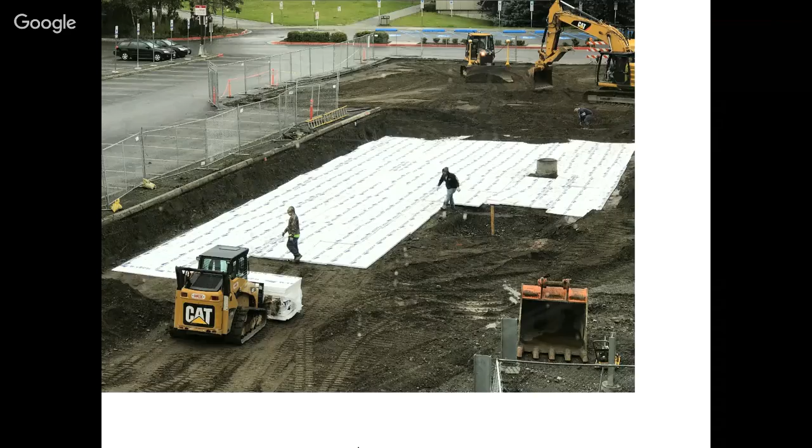Talk about motivation. You guys probably have seen plenty of plastics, polymers, petroleum-based products being used and being dumped everywhere. Lots of stuff. Expanded polystyrofoam, used for packaging, insulation. We use a lot of them here. Examples, fishing, those buoys. You just have lots of waste being disposed. And back to Alaska, any construction project in Alaska, you have to use some sort of insulation material, either fiberglass or polystyrofoam.

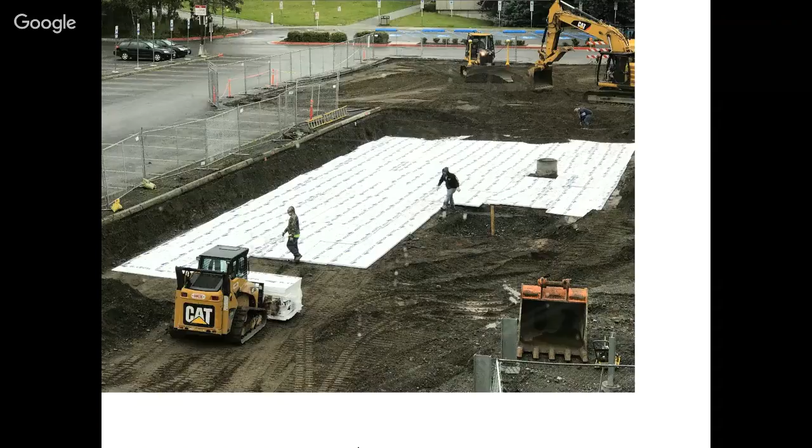Here's the parking lot right in front of this building. During last fall, am I right? Or last late summer, because of the differential settlement, the frost heaving, we had to dig it out and put a layer of insulation here so we can limit the frost penetration to control the frost heave, particularly differential frost heave, so that the parking lot is still flat at any time of the year. And last year, it was not the case, okay?

And this is a segment of highway on the Dalton Highway approaching Prudhoe Bay. It's on permafrost. Once you build a highway, you strip the vegetation, all those organic soils. That's almost like taking off our jacket. So the insulation that's already there in nature for the permafrost is gone. Given time, the pavement is absorbing heat from the sun. It's melting the permafrost, causing the settlement or differential settlement, damage on pavement. So at some point, they just decided to rip it off, rebuild it with a layer of insulation, miles and miles of them, okay, to make it last a little longer. I would say that's the idea.

So all those traditional insulation materials that we use, they are definitely very light, hydrophobic. That means they are not attracting water, moisture. They are very inexpensive. Okay, you go to Home Depot, you buy a bunch of them. They're fairly cheap. However, because it's based on mineral or petroleum products, it's not sustainable. It's non-renewable. And most importantly, okay, this thing, it's plastic. You dump it in the environment, it's not going to break down in hundreds, if not thousands of years. It's going to be there for many, many generations. So every year we dump a lot of them.

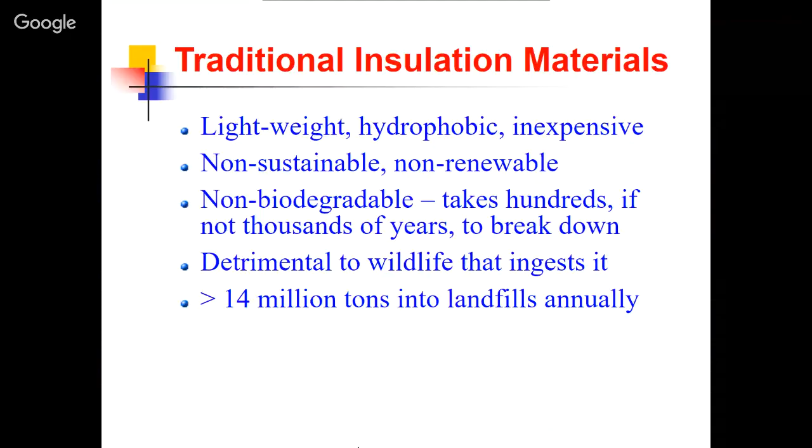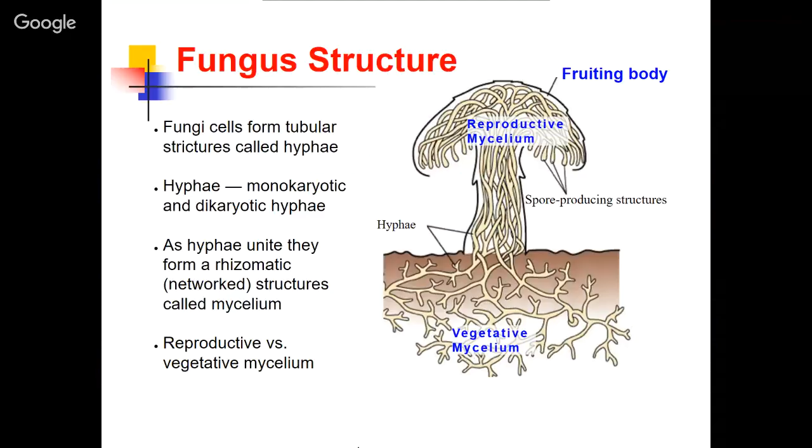So all those myceliums consist of hyphae, filaments like our hair. That is the fungal mycelium. That is the part, not the fruiting body, but the root system that we're trying to take advantage of to bind together with our material and form some sort of stuff. More on the fungal mycelium: those are filaments composed of long thread-like cells connected end-to-end.

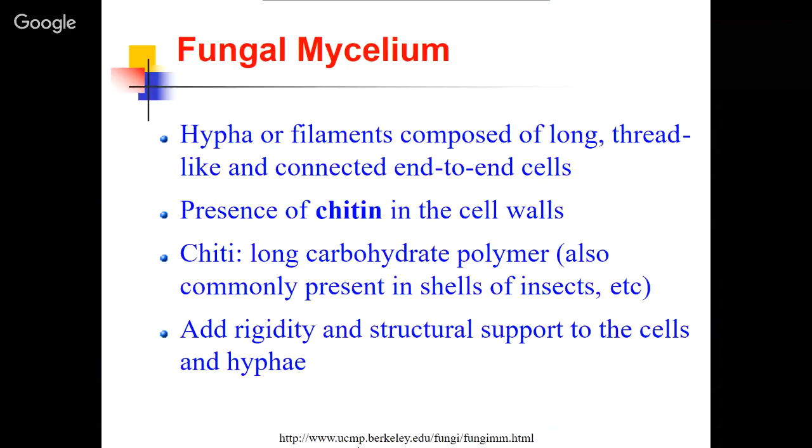In the wall of the cells, it has a special naturally produced polymer. It's like our plastic, but it's a naturally produced polymer, some kind of carbohydrate. It's like our fingernail, or our hair, or the shells of insects. It's the very same material, but naturally produced. That actually adds rigidity and structural support to the cells, to the hyphae, to the filament that we are trying to take advantage of. So that is the key, the science of this project, of this idea.

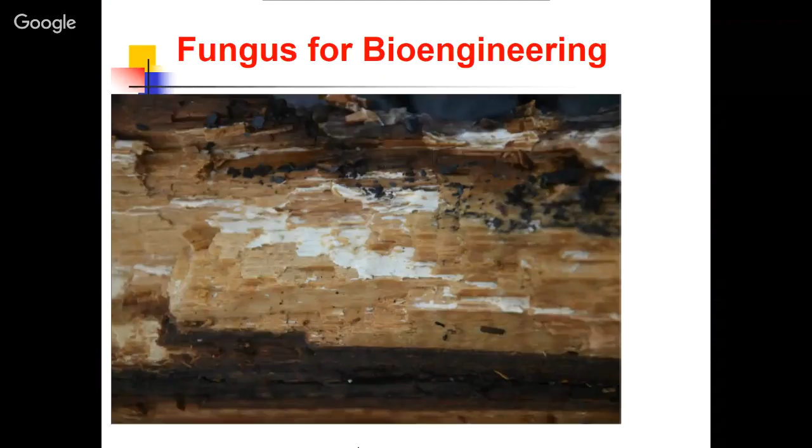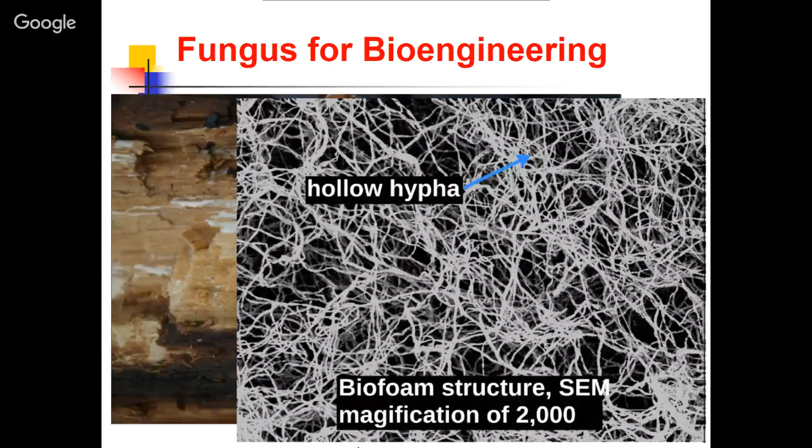So the idea of this project is to take advantage of those fungal mycelium and combine them with our substrate, feedstock, natural fibers, sawdust, agricultural waste, plus some additional nutrients, additives, and form a three-dimensional matrix bound together by those myceliums, which we call the biofoam. And because the filament itself is hollow, there's lots of air trapped inside. Insulation is about how to fix the air, right, in your jacket, whether it's feathers or fabric.

Tom, you have a question? Yes. So is the fungus actually consuming the waste? Yes, it's consuming a portion of that. That was a trick question because it actually does. Yeah. Tom Ravens has a question.

Is the fungus consuming the substrate, the feedstock? Yes, 100% true. That's the point. For the mushroom to grow, it needs nutrients. The forest waste, sawdust, or agricultural waste provides the majority of the nutrients. So it's trying to find moisture and nutrients to grow, to colonize. It does consume a portion of that, and then you still have some residuals left over, and that's what we bind together to form a matrix. So the majority is air, actually. That's why the material is light.

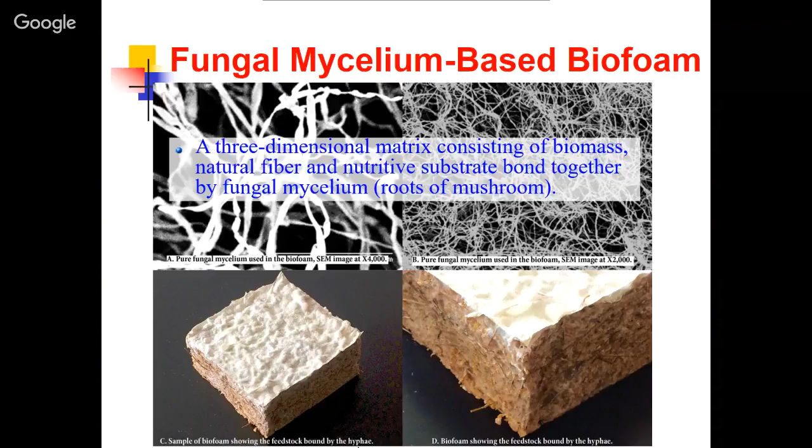Now for the bioengineered material, we're taking advantage of the mycelium. We promote the growth of this mycelium in a matrix in a controlled manner. The matrix is formed of mostly agricultural waste or forestry byproducts, plus some ingredients, to form this biofoam, nicknamed mushroom insulation. So manufacturing versus growing, it's very different. It has totally distinct properties, and impact or footprint. I'm going to talk about it later.

So where is it made? Like that board that you showed, the mushroom insulation, is it made in a factory? I'm going to talk about that. One question was, where is the mushroom insulation material made? It's not made yet. It's not available in the market. We are trying to make them, and I'm going to show you some preliminary results. We have 4x8 panels already produced, and they look pretty good. It's just a matter of how to mass produce them. It might be like an industry building? There could be, yeah.

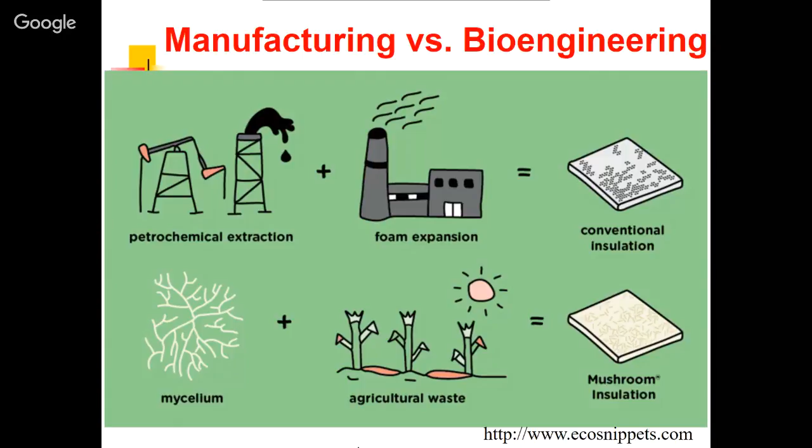That's the goal. We want to produce this material and market it so that people can use that. Okay. So this study, we had a couple of phases, phase 1, phase 2. First of all, is to prove the concept. Is this doable? Can we do that? Is the material produced going to be useful or comparable to the commercially available material, to the stuff you can buy from the Home Depot? Can we do that? Can we get there?

Okay. How to optimize the process so that we can do it in a time-efficient way. How long it's going to take. We don't want to take months or years to grow, right? It's going to be too slow. We want to do it very quickly, consistently. So I'm going to present some data to compare those key properties, like R value, the density, the toughness, the modulus of elasticity, the flexural strength, with the commercially available material. And then some prototype process for mass production. I'm going to show you some ideas.

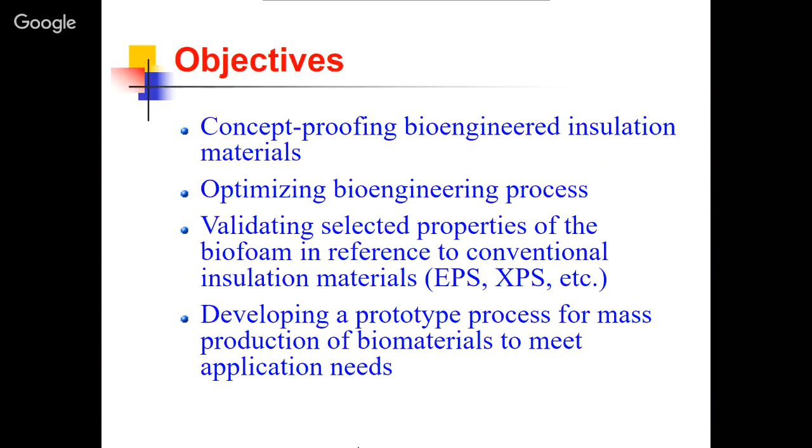I'm only going to talk about some key aspects. The bioengineering process is pretty complex. Many of you probably don't care, but some key aspects about the process. First of all, you cannot just use any mushroom to produce this material. It has to be a fairly unique mushroom that we selected, actually from Alaska, that has a very tiny fruiting body, because that's the part we don't want to use. It's kind of weak and it's edible, right? We want the tough vegetative mycelium part, the root part. So it's a special type of mushroom that can survive in cold temperature, that we have found very

promising. And then the second item would be the nutritive substrate, the feedstock. What do you use to grow the mushroom? Which one would be more effective? What is the percentage of the combination? We have tried sawdust in different particle sizes, fine or chopped wood, different types, adding some other materials. The blending mixing protocol: you have to add the culture of the mushroom to the feedstock. How do you do that? What process do you follow? I have some pictures to show that.

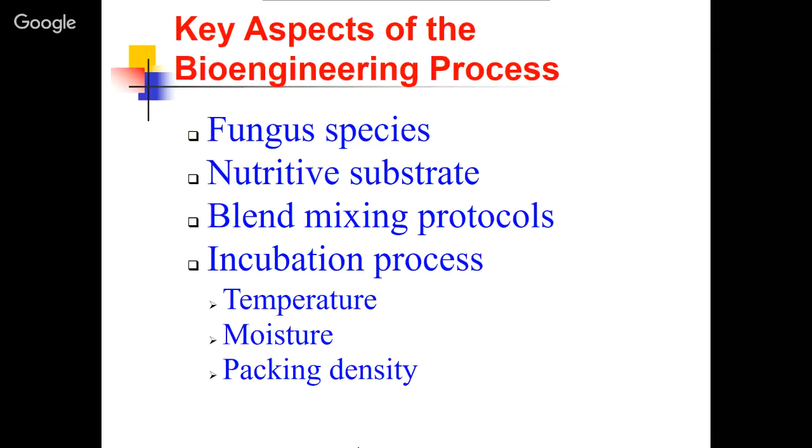Once the feedstock is mixed with the culture, then it's the process of growing. We call it incubation. How to grow the mushroom. In the incubation process, the temperature. Some of you may have grown mushrooms. Temperature is one thing, right? It does not grow in the winter time if you don't have a greenhouse, or if you heat it up. At low temperature it's not going to grow. Moisture is very important. The packing, the density, the ventilation, are all important factors.

We found out that, first of all, it can accelerate the growing process, and it also allows the matrix to be more sturdy. Put it in plain English: more extensive growth of the matrix to bind all that stuff together. So just two examples of the blending mixing protocols, and what difference it can make.

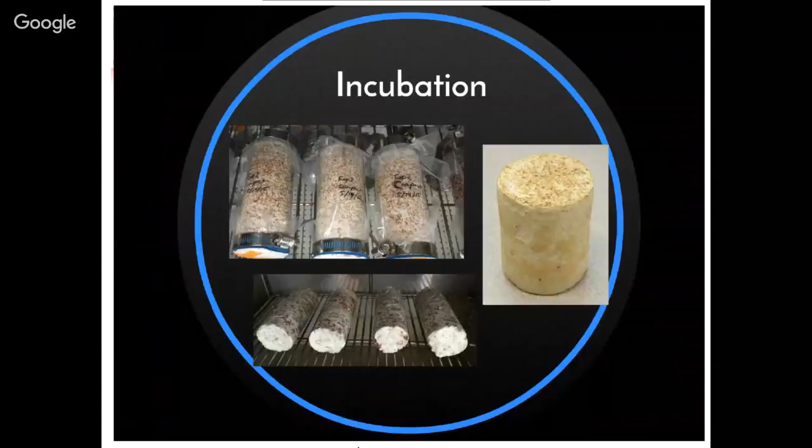Here's a picture of some samples in an incubator. And if you zoom in, look at the material. To answer Tom's question, you still see some raw material. It's not 100% digested, but all those gaps are filled with the matrix, with the mycelium. So the air is fixed inside those voids or tubes, so that there's no convection going on if it's heated up. So that's how we make it very insulative, how the R values are very high.

I forgot to mention the names. Maria White was one of them. Kellen Lee is one of our graduate students who have been helping with the projects.

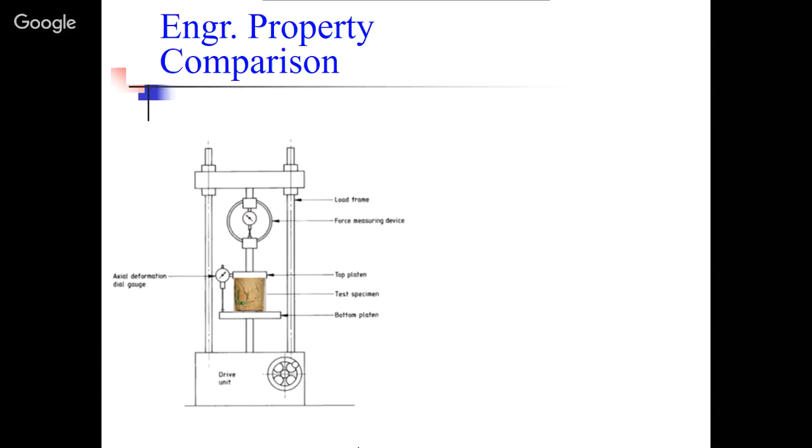Some samples we produced in the first phase of study for mechanical testing, they look very consistent. At the early stages, we have run some tests, like where you test those concrete blocks, for example, just unconfined compression test. And you would obtain those so-called stress, strain, how much deformation. Those are different recipes, 5, 6 groups, and looks like this guy is standing out. And that happened to be our group number 3 over here.

Not just the compressive strength, but also the modulus, shear modulus. And here's the thermal conductivity. They're about the same density. This is about the same as the others, but overall, that recipe number 3 seems very promising. So we build on that and then make some changes, trying to improve the process. So let me not go into the details here.

Talk about mushrooms. There are many edible mushrooms, but also there are many toxic mushrooms. So always a question people ask, is this going to be toxic to my pet? If they chew it up, if I handle that, am I going to get poisoned? So we did do a toxicology test. It's very safe. As a matter of fact, if you take the sample out from the incubator, it's just like mushrooms. It's very fresh smelling. I mean, if you're too hungry, you could eat it.

And some more mechanical testing here. Here are some small beam specimens, like the structure members, that you can see have some features. This is one of the newer specimens. Some scaffolding already built in there to accelerate this growing process. So it's not only growing from the outside, but also growing from the inside. So that can cut the growing time almost to half or 1/3.

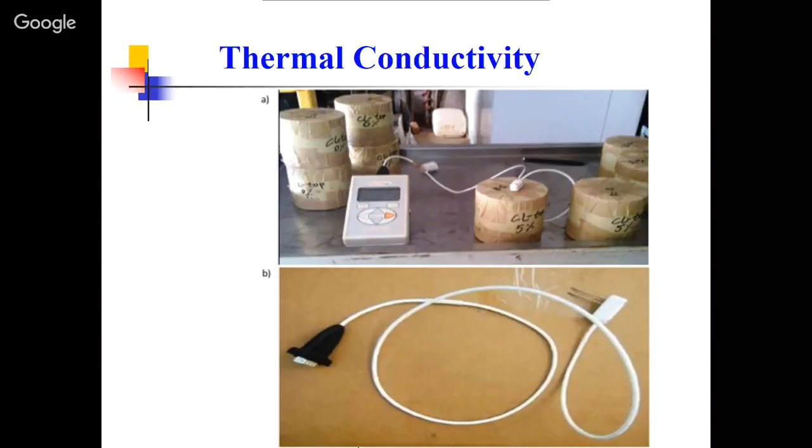The idea here is to have 1 needle to heat up. You measure how the temperature rises, time and temperature, and then you shut down the heating source. You measure how fast the temperature drops, because inside the specimen, the only mechanism for heat transfer is conduction. So it's conductivity.

So this equipment is very portable, is low cost. Compared with some other tests, this is very simple. This piece of equipment is still expensive, about $6,000, for a small one this size. But it's very useful. The accuracy is about 5%. We are pretty happy with the accuracy.

So a couple of equations. This is for heating. This is for cooling, and those parameters. Actually, B1 is inversely related to K. K is the thermal conductivity. Just one example how we figure out the thermal conductivity. Not too much on the theory here. I'm going to show you some numbers here. Okay, you're all engineers.

Comparison, for example, of the density. This is the dry density. Okay, those are our latest 5 recipes. This is the latest results, very fresh, a couple of weeks ago. This is the competition in the market, Ecovative, for packaging purpose. So it's about the same, I would say. The blue boards that you buy from Home Depot are still lighter, I would say. We still have some ways to go, but we have some ideas to improve that.

The thermal conductivity here, our numbers are about the same as the blue boards. So very encouraging, very promising here. If you talk about insulation, it's about similar performance. Now, compared with the market, similar type of material, 50% better, or the R value is twice as large. If you use our material to make a box to ship your fish to your friends, it can last twice as long than the Ecovative material, or about the same time as if you use those EPS foam boards. So we're very happy with the results.

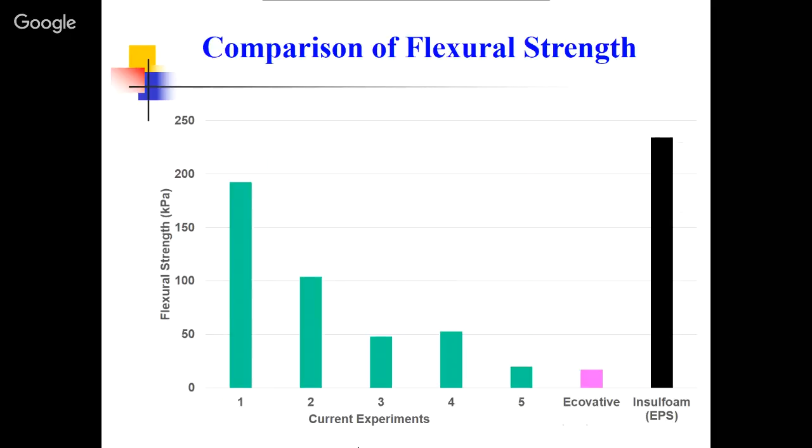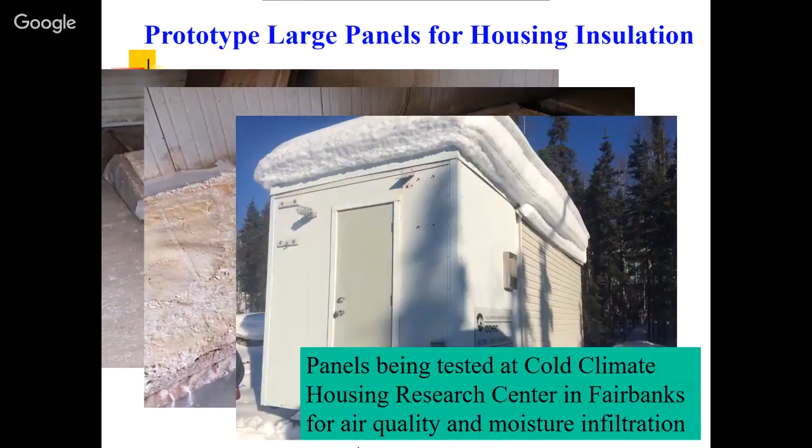And talk about production here. Last summer we tried to produce a few larger pieces. People wanted to try that. It's not for sale, it's just for experimenting. So we produced 3 4x8 feet pieces, about 2 inches thick, and they turned out to be pretty good. Those 3 pieces are now being tested at the Cold Climate Housing Research Center, side by side with the blue boards and some other materials.

There are 2 parameters we want to check. One is the air quality, of course, inside the panel. Lots of research says petroleum-based products have toxic emissions in the air. Not much, but there's some. So we're going to check how the air quality compares with different panels, different materials, and then moisture infiltration, all those other aspects. It's being tested now. By this summer, we would have some results coming out.

Talking about moisture infiltration, is there an estimate comparison? What kind of vapor barrier would this be as opposed to? We don't have that yet, but I'm going to touch on that one. That's a good question. The question was about moisture infiltration. That's one of the challenges we're trying to work on, but I'm going to get back to the question, okay?

When we present this and people are interested, they want to use it, the natural question is how do you produce that? What does it take to do mass production? I think it's quite doable. From a first cut, I would envision a few silos to store the raw materials, either forest waste or agriculture waste, with some other ingredients. Then it's proportioned onto a conveyor belt, mixed together, and then you have to sterilize it, because natural materials have lots of microbes. You don't want them competing with your mushroom. So sterilizing definitely is one process.

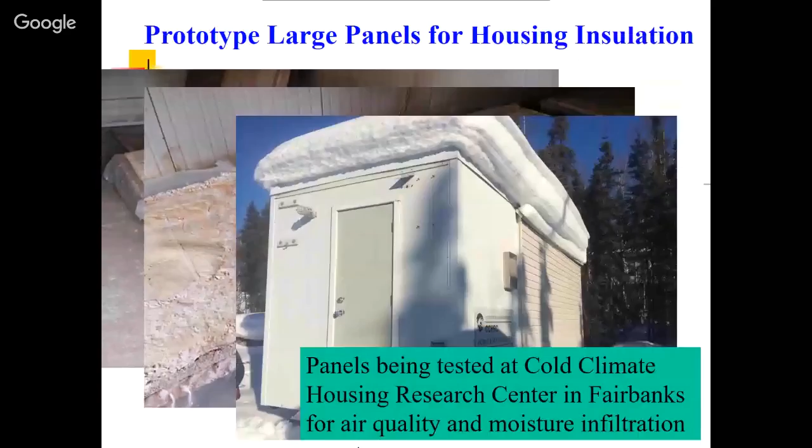The question was, for this species of mushroom, how big is the fruiting body, and are spores produced? The fruiting body is tiny. We inhibit that, so it's basically only the mycelium itself that was live. There were no spores, and the mushroom was not able to produce any spores. We discourage or inhibit that. So it's not producing seeds for more mushrooms? It's not.

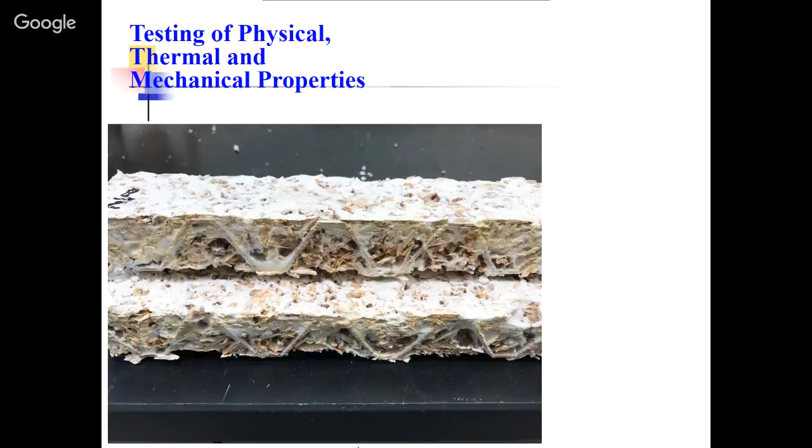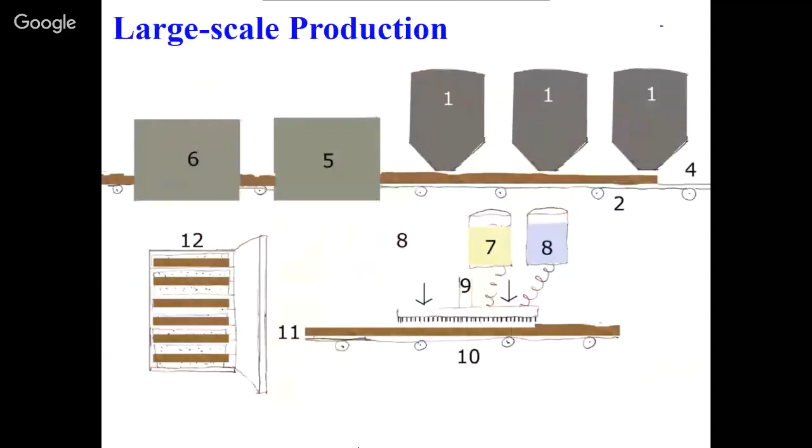There was one question about, what was the question again? The vapor barrier. Yes, the moisture. Let me see if I can find a good example here. It's probably back here. Okay, I have a nice picture to show that.

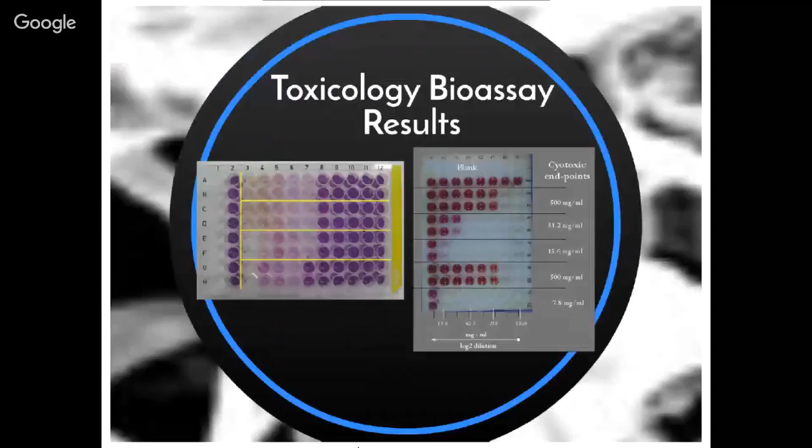So the mycelium material itself, when it's growing and hitting some different object, for example, here is all organics, right? When it's hitting a mold made of glass or steel, it finds out this is like its enemy, something very different it cannot digest. What it does is produce a special type of protein enzyme to form a skin to protect itself, just like our skin protects against germs and bacteria attacking our body.

So naturally, in the growing process, a skin is formed, which repels water very nicely. And we are also researching different measures to add redundancy. This is one defense, and we don't want to rely on one defense. As an engineer, you always want some redundancy. So we are looking into some sprayable stuff, like latex, to produce another line of defense against infiltration.

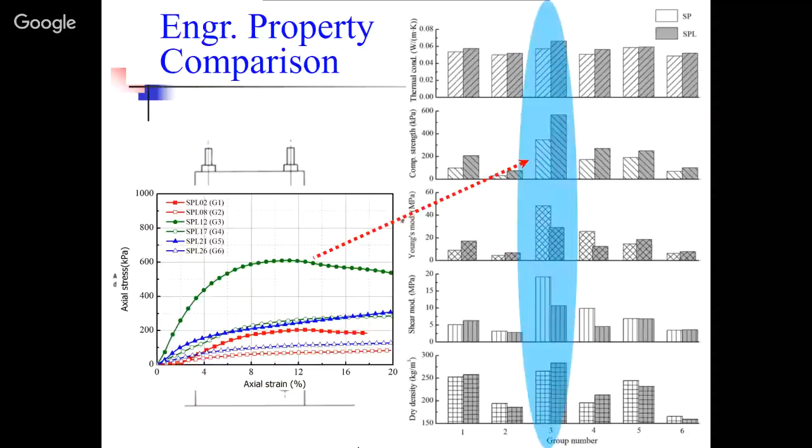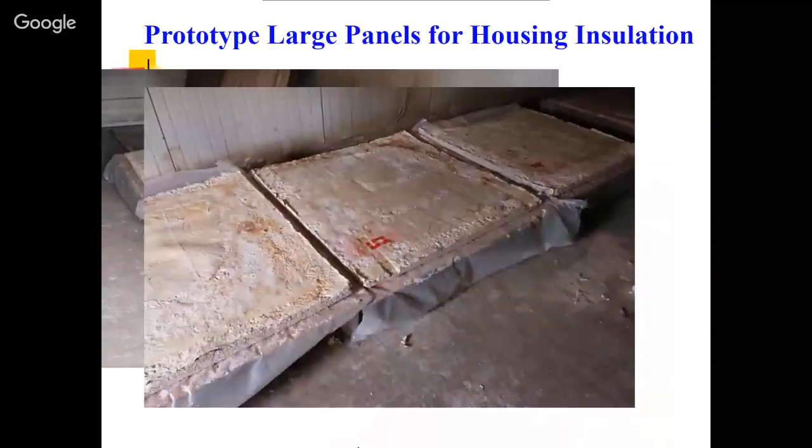But the material itself, because those are hollow tubes, is actually resisting moisture pretty nicely already. It's very light material. It's not attracting moisture itself. Okay. So that's actually one of the questions that we are trying to address here. But to summarize, this material is very light, and of course it's renewable. That is the main point here.

Okay, non-toxic, lightweight. The R value is about the same as the blue boards you can buy from Home Depot. That's as good as you can get. The thermal conductivity was like 0.04, very close to that of the air. Most important thing is that when you don't want it, it's biodegradable. A few weeks, depending on the temperature and moisture.

You dump it into your garden, and it's going to turn into fertilizer. It's going to disappear into the natural environment. So that's the beautiful thing about this material itself. When decommissioned, it's biodegradable in a short period of time, compared with polystyrene foam, which takes hundreds, if not thousands of years. So that's the big difference there.

We do have a patent pending with the U.S. Patent and Trademark Office, and potential applications. We say the immediate application would be fish shipping boxes. People want to buy it. They like the idea of having some organic, green material to ship organic fish from Alaska to their friends, and then you just dump the box in the backyard. So there are some applications there.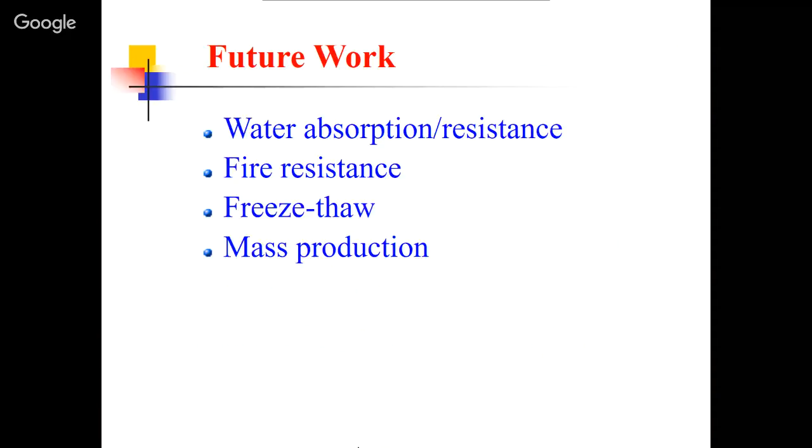So that is our plan here. We have some time for more questions, I guess. Tom. So the existing natural product is your competition. Do you know how that is made, and what kind of market share they have? How do you see your product compared to it? Yeah, good question. The question was about the competition, Ecovative. How big a market share do they have, and how is our product different from theirs?